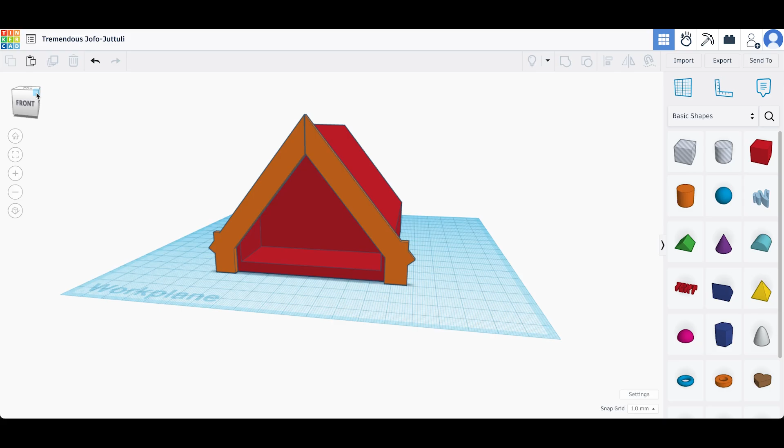We're going to make this wharenui using simple tools and simple shapes combined together to make a more complex shape, from simple objects like the cube and the triangular prism, and using the hole function, the align function, and the group function. The first thing we need to do is get the basic shapes that we need.

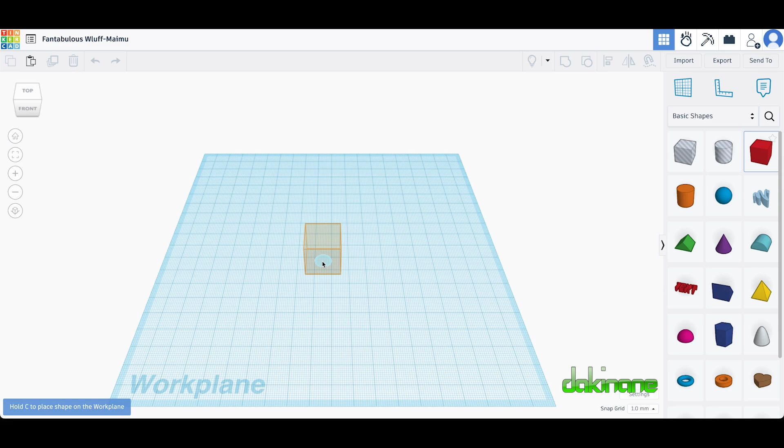So I'm going to use the cube and drag that in, and we're going to use some options here. We need to keep things simple and accurate. So I want to set the width of my wharenui to 80 millimeters.

Once I've set my width, I'm not going to worry about the depth. We'll deal with that in a moment. First of all, I want to set the actual height. This will determine the pitch of the roof.

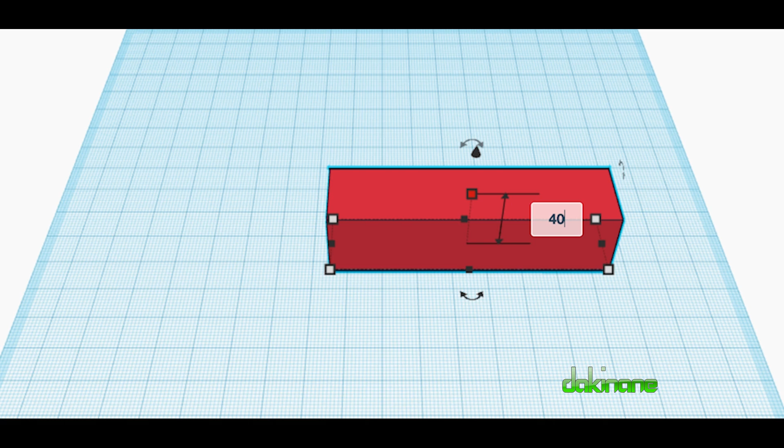So let's just click on this. I'm going to make this 40 millimeters tall. That should be good enough. Maybe I'll take it down a little bit, but you can play with this. I'll make it 35 millimeters. And so this is the basic shape of my wharenui. Doesn't look like anything yet.

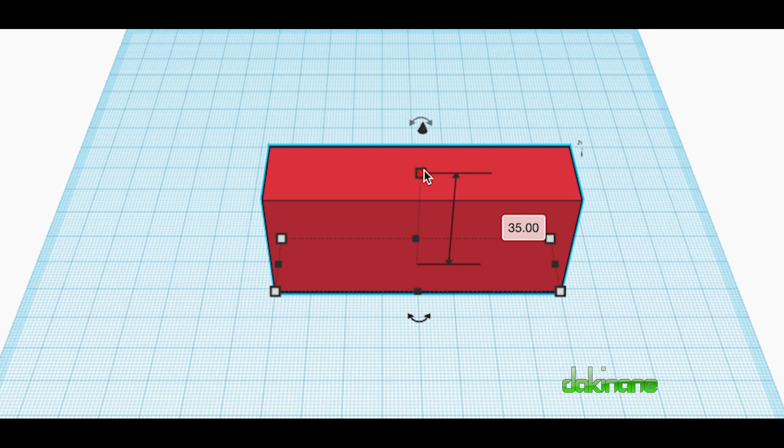Next, I'm going to pull across the triangular prism, and I'm just going to line it up roughly. And we know that my width was 80, so I'm going to copy that because I want to align these. Now that pitch is too flat for a wharenui, so I'm going to make the height of my prism.

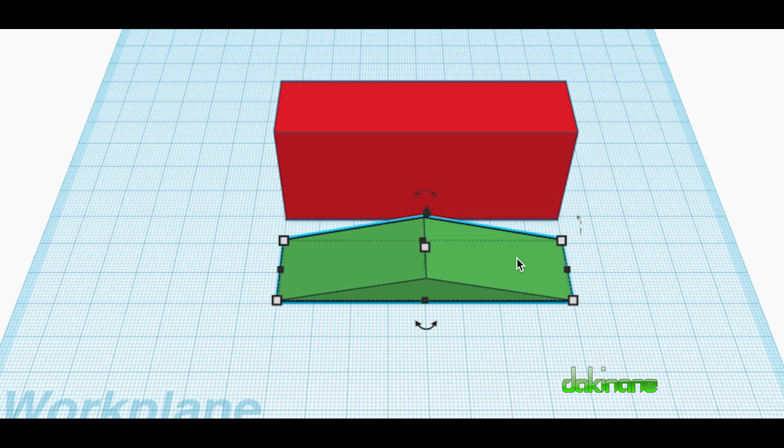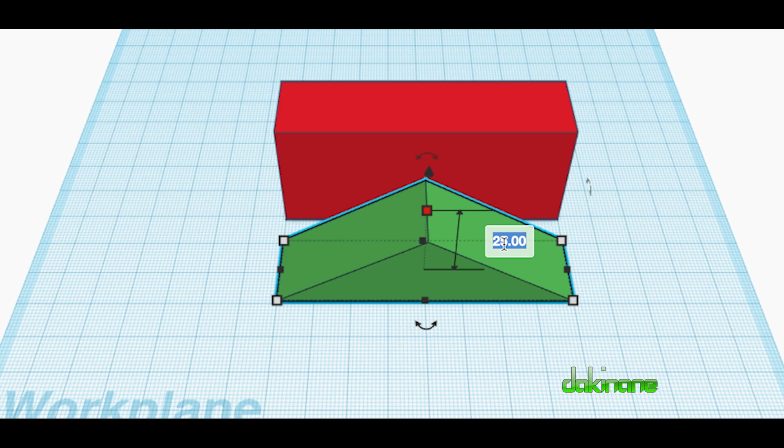So the overall height on this one was 35, so I'm going to click on this one and make this - let's just see what it looks like to start with. I'm going to make this 25. Is that going to be good enough, do I think? No, I think I probably need to make it - and it's all about proportions. I'm going to make this 30, and I'm probably going to reduce this one down to 30. That'll do us, I think.

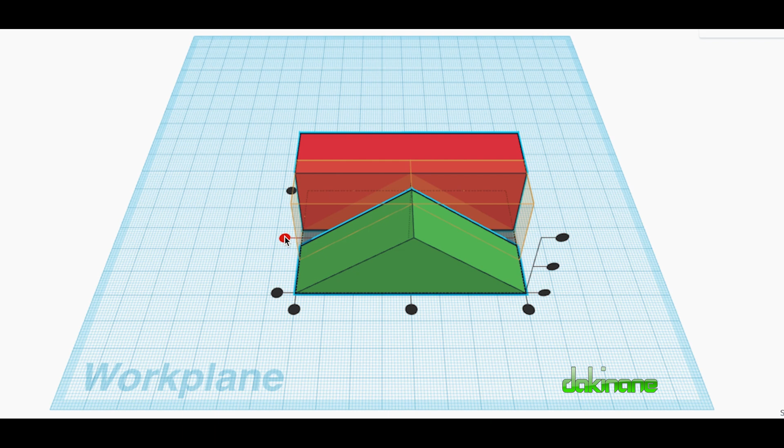Right, so now I want to align these up. So all I've done is set the heights. I'm going to highlight both of them, and I now want to use the align tool, and I want to center them. Don't worry about the fact that they've gone inside each other, doesn't matter.

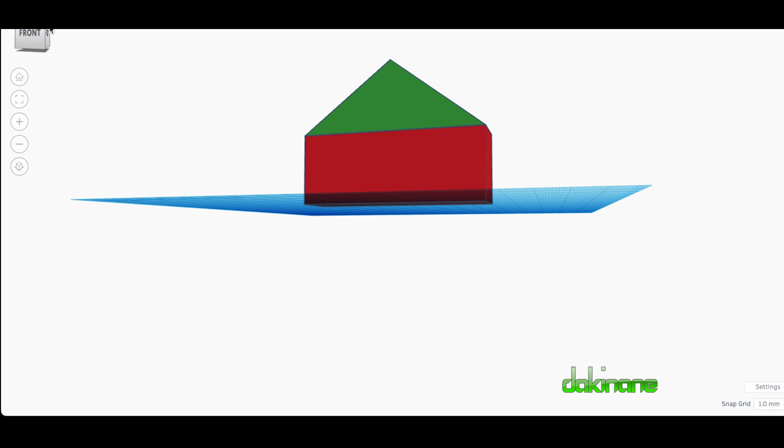I'm going to use this lift tool now, and I want to make sure this is lifted up the height of that red block, and I made that 30. And these are my two blocks organized on top of each other. Let's just have a look at this. Do I think it's got the kind of proportions of a wharenui?

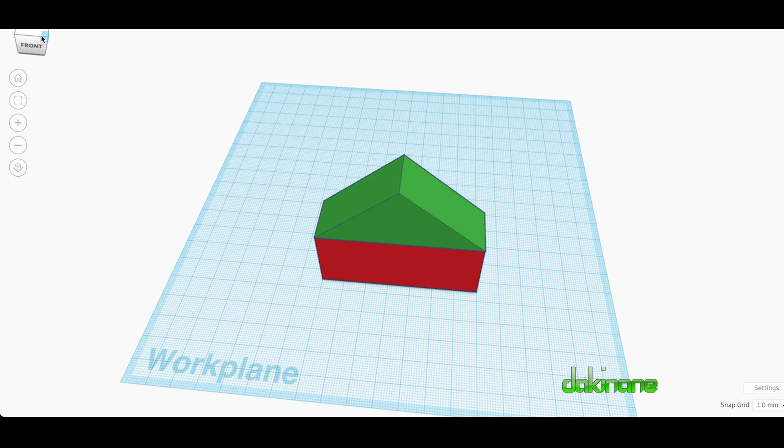Possibly, maybe I think 80 is too wide in terms of proportion, so I'm just going to reduce that. I'm going to reduce that to 70, and that means I need to reduce this one to 70. And if things get misaligned, let's have a look at this again. Yeah, I'm happy with that.

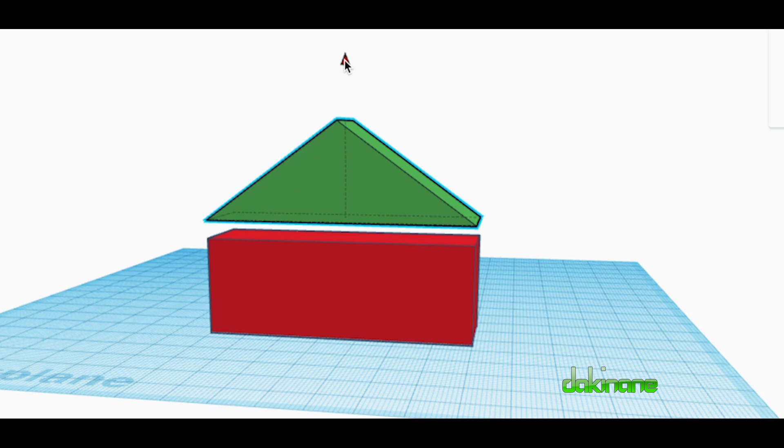I might bring this one down to 25 now, and then this means I need to bring the height of this down to 25 above the ground. Wrong one, Command Z. And I need to make that 25, and they combine again. So I've now got two blocks aligned with the kind of proportions that I think I want.

So we need to remind ourselves, is this what I want? Yes, it is. So first of all, I'm going to combine these. So again, select both those blocks and click on the combine tool. Now I've got a combined shape.

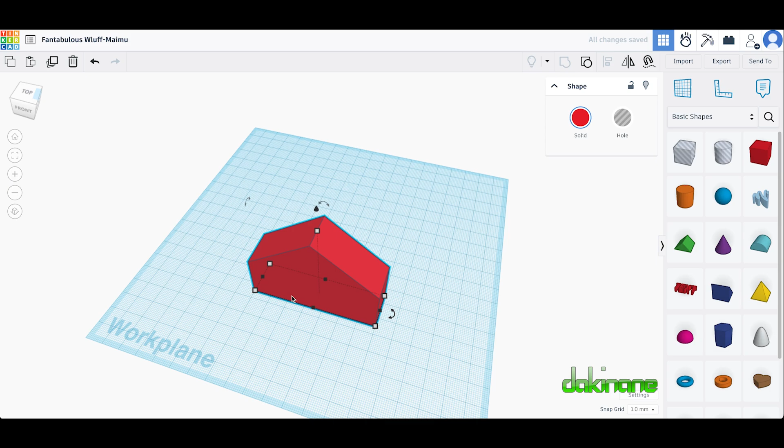Next, what I want to do is copy that. So I can use the copy function over here, copy, and I can paste. There we go, I've got two blocks. Now I want to use this other block to cut this second block here.

So I'm just going to move this out of the way and remind myself of my dimensions. That's 70, so I want to make this one 60. I want to have 5 millimeters depth either side, so I'm going to make that 60. And the overall height of this one was 50, so I want to make the overall height of this one 40.

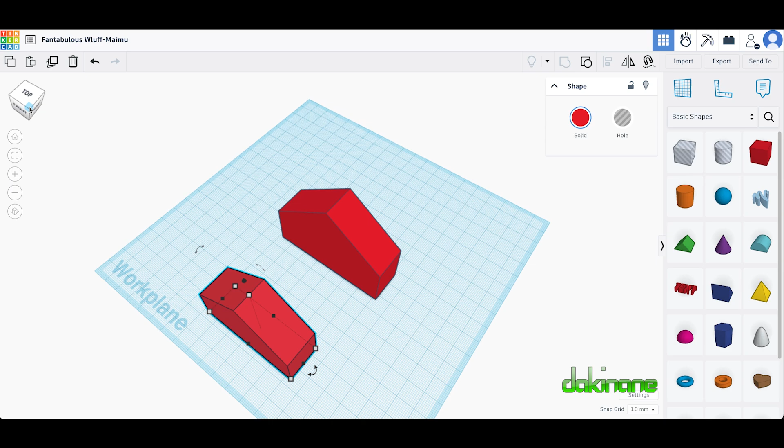And I want to lift it 5 millimeters off the ground so I can make the recess for the front of the wharenui. So let's just lift this up, click on this one, lift it up and make sure that's exactly 5mm.

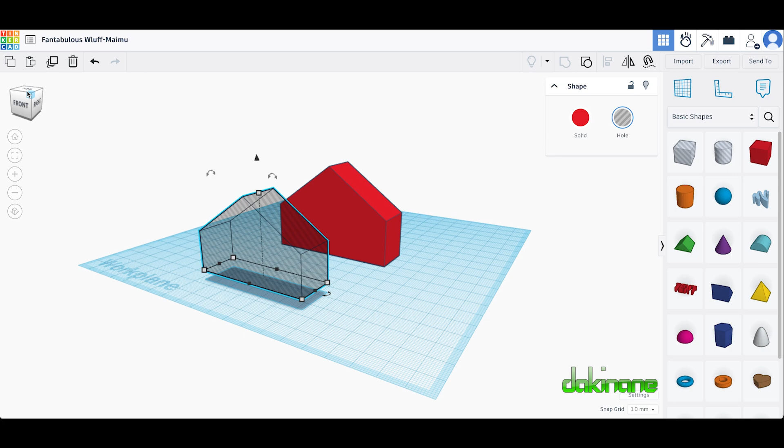Right, so I want to turn this into a hole now, and I now have a hole that's floating above the ground that I'm going to use to push out the size of my wharenui here. So what I want to do first of all is just kind of get them roughly lined up.

That'll do. Again, because I've moved it around, let's use the align tool. I want them to be centered, so let's just highlight and then use the align tool and center them both with each other. That's good, that's all I want.

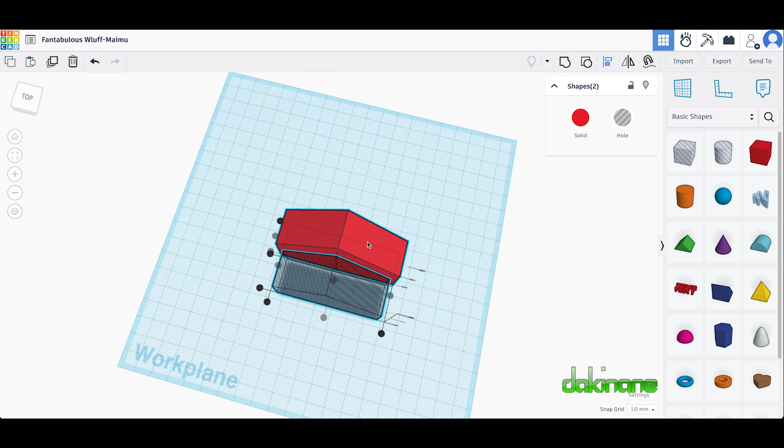And I'm going to now remind myself the width of the back of the wharenui, so I want to make it longer. Currently it's 20, let's make this 80 deep. That's the length of my wharenui, and I now want to push into the depth of my recess here in the wharenui. I want to push that back.

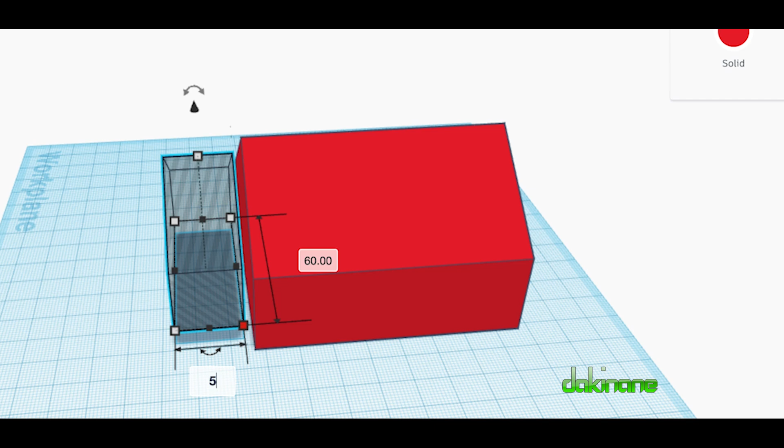Let's go 30mm. Oh no, let's add an extra 30mm, that makes it 60. So it's going to push that far into the front of my wharenui, and you can see I've got a recess being made. So now I need to use that hole to cut out that shape.

And now I'm going to come up here to the combine or group, click on that. I've now got this object here. If I zoom in, we can see inside our shape, and that's the first part of making our wharenui.